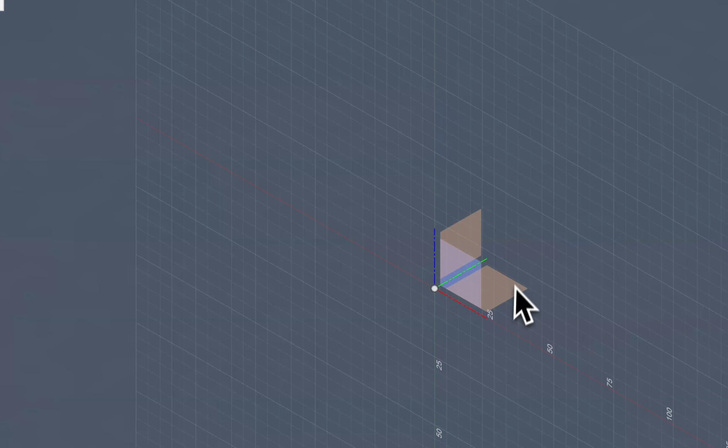Then we go to creating the first sketch. The first sketch we will place on the XY coordinate. This is the XY coordinate. If you don't know this, you can click on the origin and click on XY from here. Now we have the XY coordinate.

We click on the rectangle, click on one of the vertices, and then when you drag it, you see two factors. You can tap to move from one of the lengths to the other one. So for the first one, say 31.1993 millimeters. I just type the name of the cube, the length of the cube you have.

So I say cube and then select. Now going to the next one, cube, and then select. Now finish, and here we go, we have it.

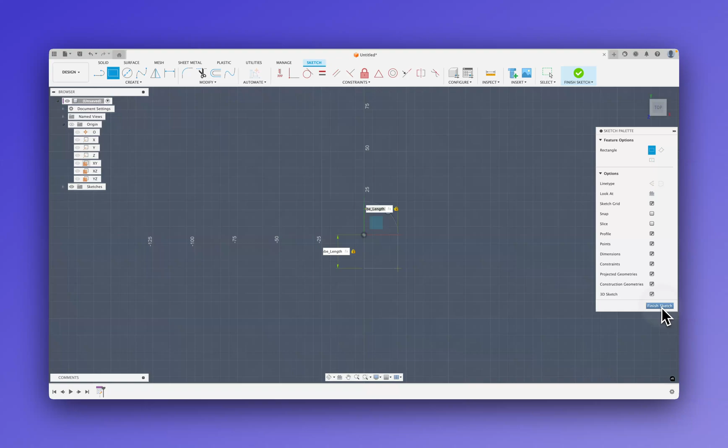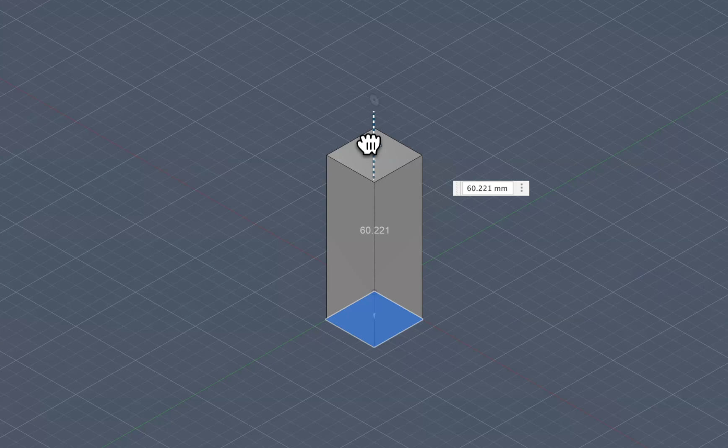So the next step will be creating, extrude this one to create the cube. Click on extrude. So you can do it this way, and in this location you can say cube length, or you can come here and write the name of the length. So we have the cube.

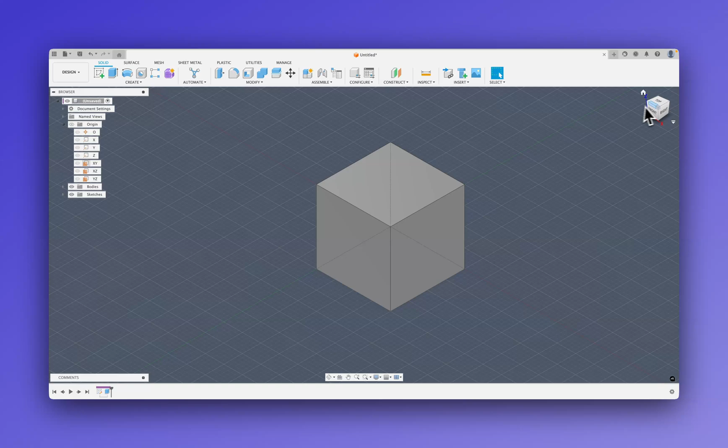You can look at the front. This is our cube. The next step, we need to create 4 holes, and to do that, first I will try to find the midpoint of this shape. So I'm looking at the top, clicking on the sketch, and I can pick one of these.

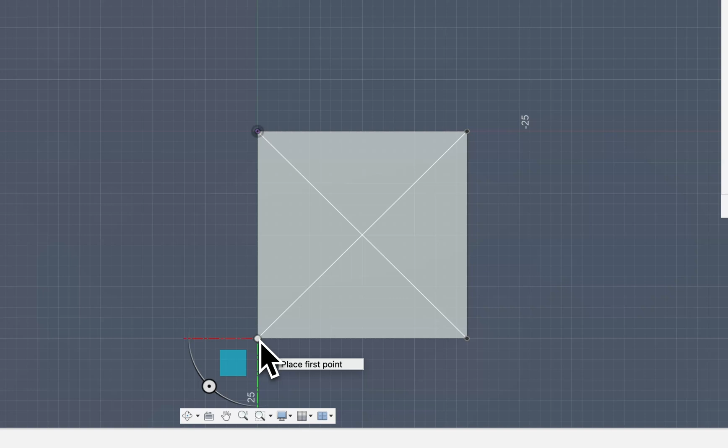Let's say pick this one, and creating 2 lines. This way I can see the midpoint, and I use the midpoint as the center of my circle. Now what I can do, this is a midpoint. I don't have to finish the sketch.

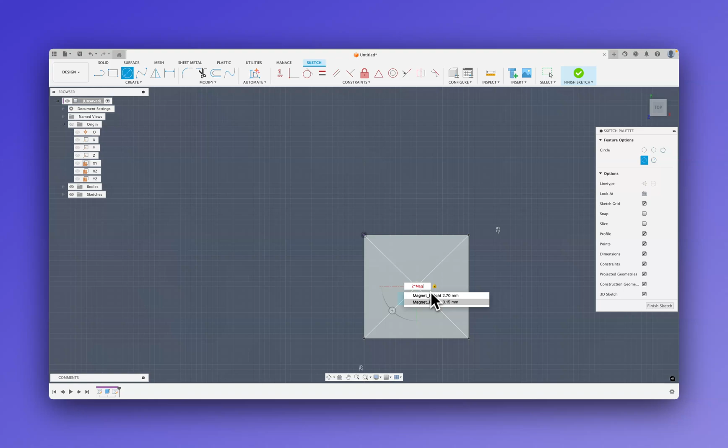I can go right away and create our circle. Now usually in Fusion you have a diameter, so since our parameter is radius, we need to multiply it. To multiply, magnet radius, enter. Now we have our circle, so if you don't want this, you can just delete this part.

Now click on home, you see the circle that will be used for a magnet. So click on this region and go to extrude. Now this time we don't go up, the positive will be extrude, and the negative will be for making a hole. So what I can do is come here and say minus.

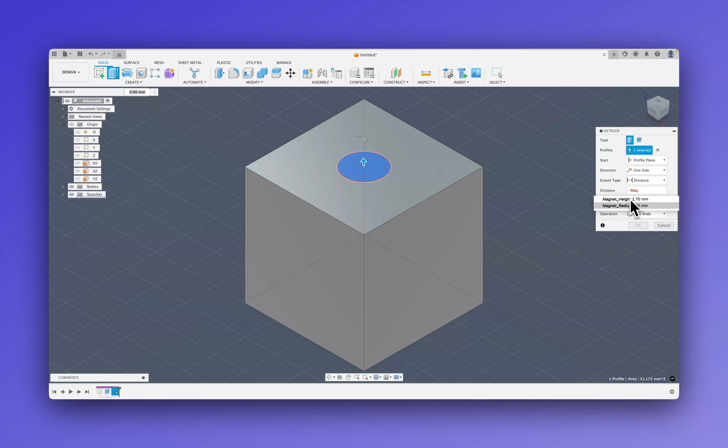We want it to be, we will use the magnet height for that. So we say minus magnet height. Now we're creating the first one.

For the next one, it will be parallel to this hole. I'm clicking on construct, and I will create the plane parallel to the XY. And here we go. Sorry, I need to make a midpoint between, yeah, first I need to create an offset plane. So let's create the offset plane.

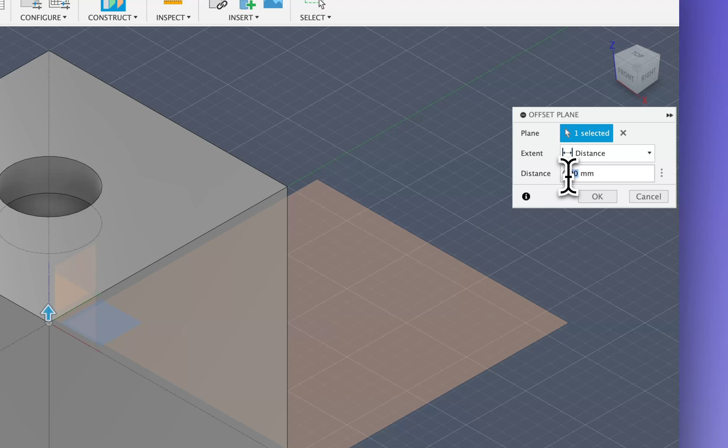The offset plane will be parallel to XY, and it will be 0.1. Sorry, it will be the length, cube length.

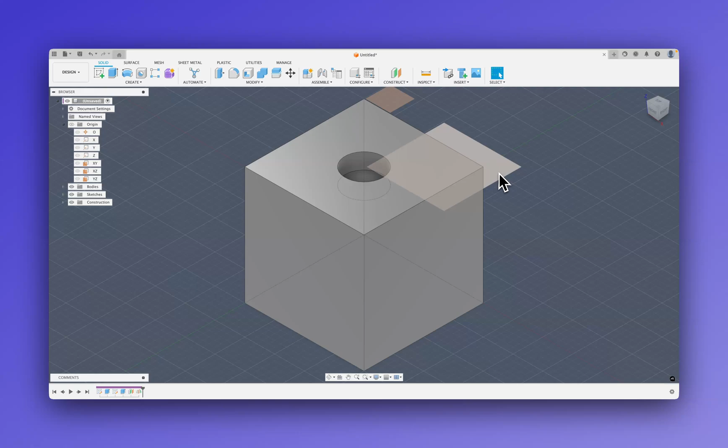So now I have a plane. I have two planes parallel to each other, and I want to find the mid plane. So click here, click on mid plane. I want to have the XY plane as the first one, and the second one will be the newest one. This plane will basically be the midpoint. If you want to see it, here you go - this is the mid plane.

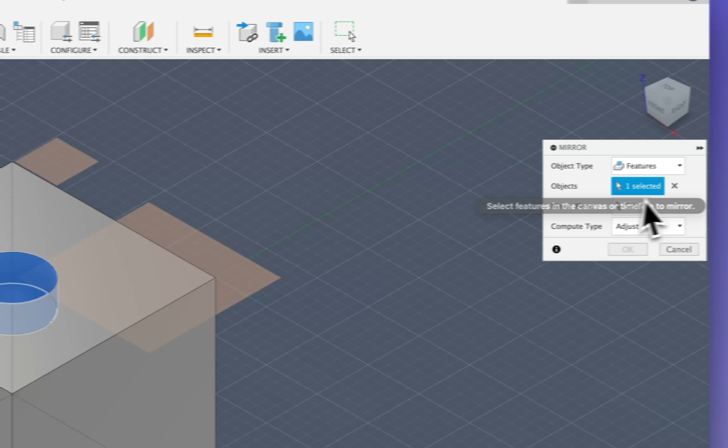So now what I'm doing is mirroring this hole to the bottom. Click on create, go into mirror. In this one you have multiple choices. You want to mirror the feature, which will be the hole. Click on the feature, click on the hole, and next select the mirror plane - in this case, that will be the mid plane. Now, as you see, this hole will be created.

You want to check it, you can look at the bottom and you see it. Now we want to make two more planes from the side, so we can hide those planes, we don't need them. You can click on construction, we don't need those planes.

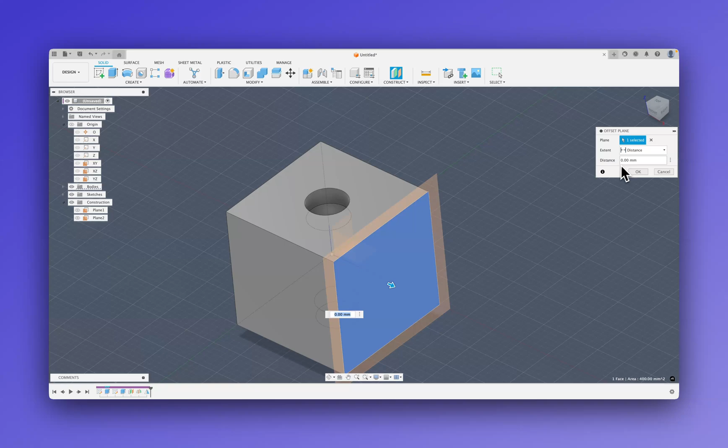So now I want to create the offset plane on this side. So what I do is create the first offset plane, that will be best. The offset plane we already have, or this one already exists. We want to go the other way, so we'll be clicking in here - cube length, but I want the other side, so I have to click minus.

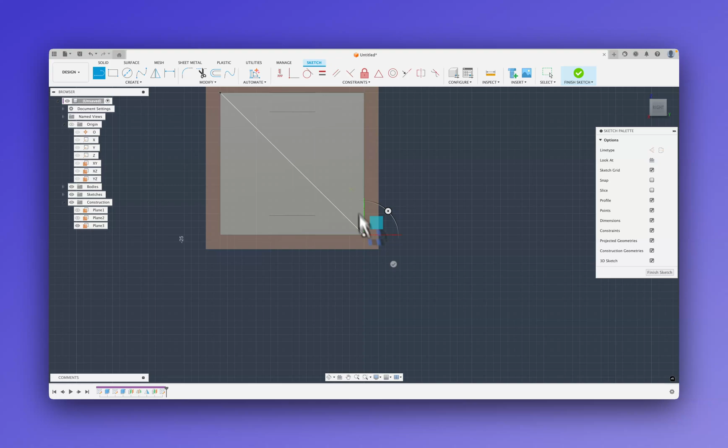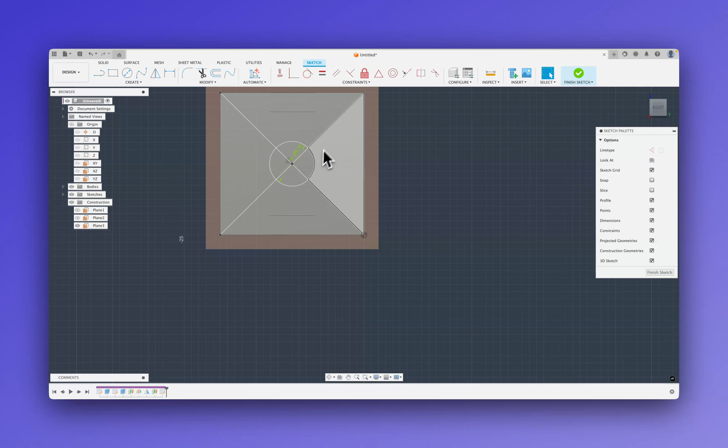Here we go. Now first let's make a sketch here. So sketch, and first I do similar - I do the two lines to find the center of this square. Now I'm using the center of the square as the center of my circle, using magnet radius multiplied by 2. Here we go. Now I don't need those two reference lines, I can delete them, and now let's do it this way.

You can see it - I'm clicking to first finish the sketch, and then click on extrude using the same settings, but minus, of course, magnet height.

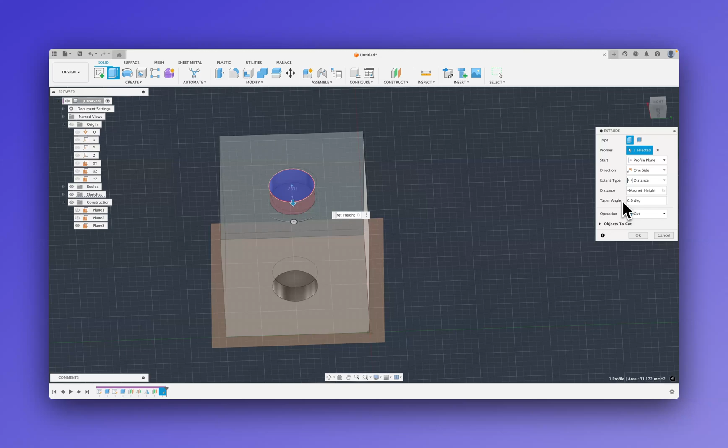Now the next step will be - I don't know - the next step we need to create another mid plane, which I believe you already have for these two. So let's click on mid plane, this one. We don't have this one, I believe, so maybe we need to create it. Okay, so let's create a mid plane. It looks like I don't have it, but let's click - actually we have it, so we get this, this is the mid plane.

Now let's go and project this, mirror the same thing. So click on mirror, first select the feature, it's already there. Select the feature. The next step is to create this one, and now we have it.

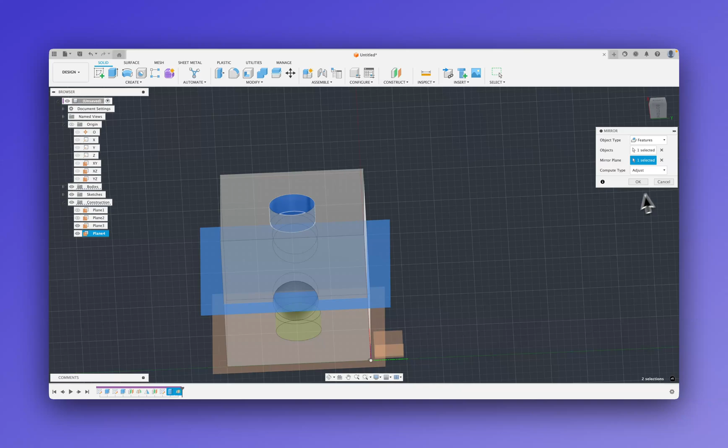So come to the construction, we don't need to see all this, and click on home. And now you see 1, 2, 3, 4. So you can play with it to see the other side. And this is the way you create it.

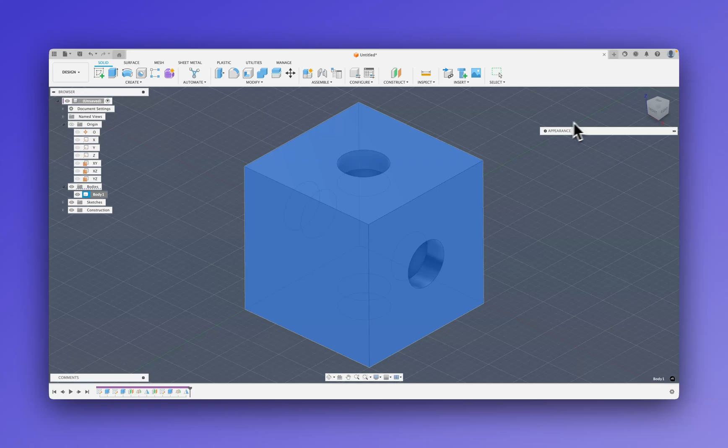You can make it look nicer. So click on the body here, and you can click on appearance, and then let's call it red. Let's pick this red or whatever red you have, and then put it here. And this is not bad - this is good.

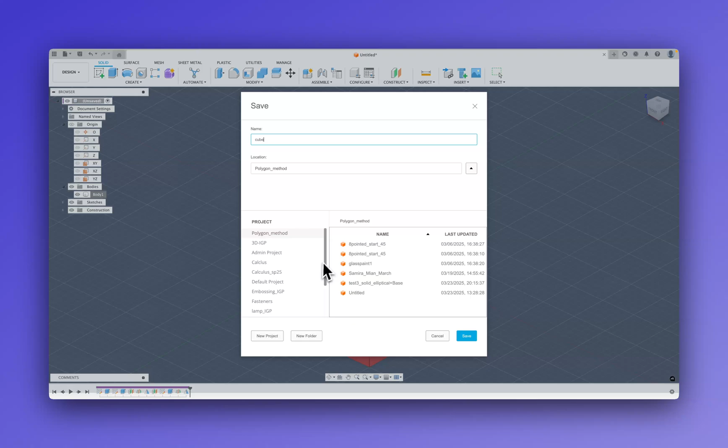So now the next step, the final step, we need to save it. And I call it cube, and I put it in the location that I already have, a project, workshop, save. And then I'm clicking on export. When you export it, you need to export it as STL. This is a file - STL - and now the file is ready to print.

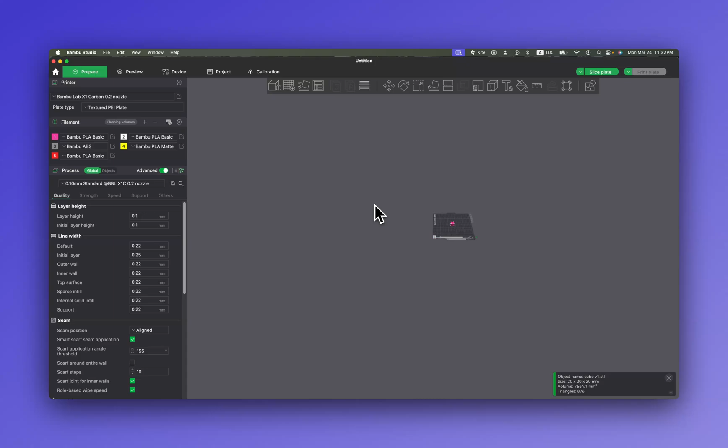So let's click on it, and let's see - now I'm opening the Bambu Studio, and I look at my cube. So if you look at it, say the cube is this side, which is great. Now, if you slice it, it tells you it takes 38 minutes.